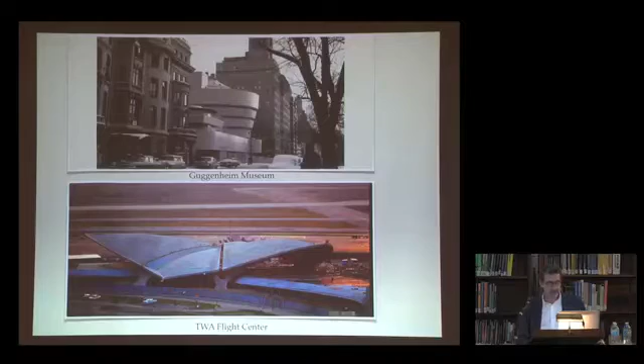Over the last 29 years, we at both ICR and ICC have been extremely fortunate to have had the opportunity to work at some of these great sites. Although periods of construction and geographical location vary tremendously, the same basic human creative spirit to design and build is there. Because time is limited this evening, I'll just focus on one of these sites.

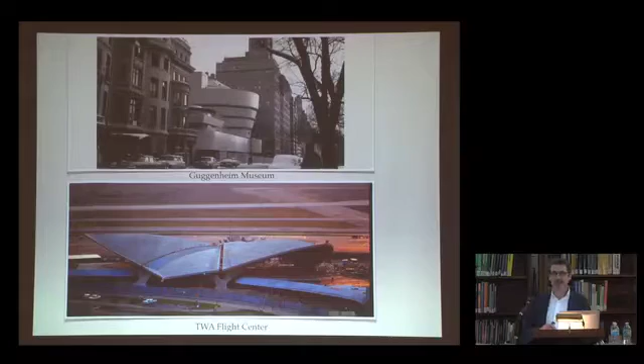And this is quite a departure from mid-century modern, but it will give you a little bit of an idea of the range of what we deal with.

Working closely with the World Monuments Fund, we've been in charge of 4 of their temple sites at Angkor in Cambodia. Working closely with the Cambodian government, as well as UNESCO, we have been designing these conservation programs, training and implementing the work with approximately 130 people ranging from architects, engineers, archaeologists, business administrators, team leaders, and craftspeople. The largest project of the 4 is Phnom Bakheng, and it was the first temple built by the Khmers when they came to the site of Angkor.

This is the general site of the ancient city of Angkor. This is Angkor Wat, and this is Phnom Bakheng.

This is Phnom Bakheng, or a small section of it, when the French came to the site in the 1940s and started clearing the jungle off the temple complex. And this is in the 1950s when the French had finished their work.

I think what's just amazing to note is that this, like I said, was a hill. Over there, it's called a mountain because there's not very many of them. But it continued up like this.

In the 9th century, the Khmers basically took 25% of the top of this mountain off. They exposed the live rock in the middle, and they carved that live rock to serve as the foundation for the structure that's there and that you see now.

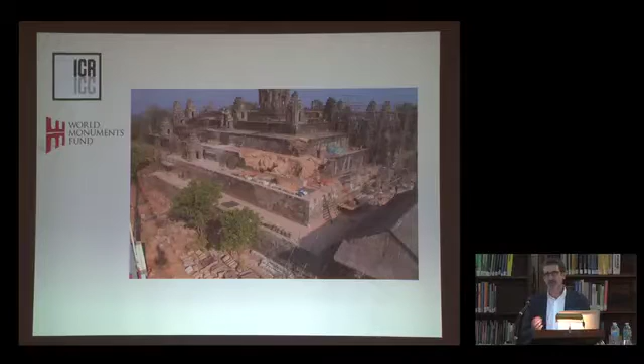Which is mid-century modern buildings. So as another brief introduction, architectural conservation to me is the science related to building materials. The roots of the field can be found in fine arts conservation.

A major difference, however, is that architectural conservators have to design programs for materials that are exposed to the elements, whereas fine arts objects can be placed in controlled environments.

Architects, over the course of time, have designed details into systems, even here at Phnom Bakheng, or in the previous slide, into their buildings that work in balance and to protect the building materials from exposure to the environments.

Yet no matter what, short of moving a building inside, wind, rain, freeze-thaw cycles, and salt crystallization, among other things, are all active pressures that constantly keep the exposed portion of a structure in a state of decay. Understanding the mechanisms of that decay, designing programs that do not accelerate that decay, and managing that decay is a part of our work.

As architectural conservators, we design our projects based on a certain set of goals. We try to save as much original material as possible or as practical. We respect the design intent of the architect and/or craftspeople who were involved in the design and construction of a building. We design materials and methods that are both physically and aesthetically compatible with the original construction materials.

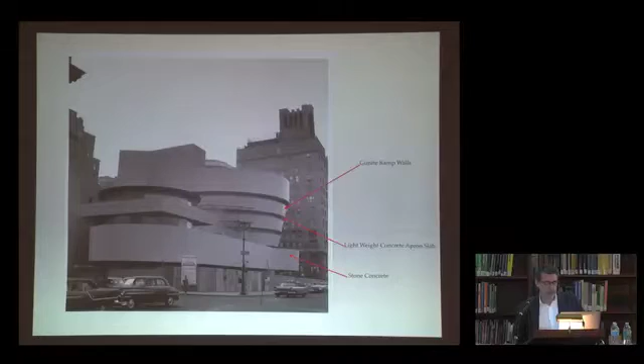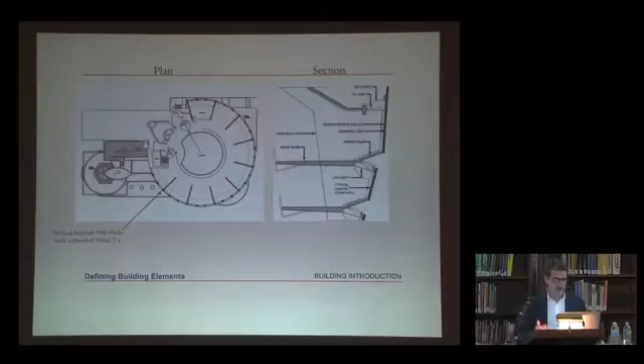There are a few other elements which we should review, and if you were at Nancy Hudson's presentation, she probably reviewed some of these as well. But just quickly, these are going to show up in the talk and in the description of what some of the cause and effect problems were.

So the vertical support web walls with their embedded T's at the web and gunite interface. These web walls are structural, and I'll show you some pictures of them as the building goes up. They run every 30 degrees, I think, and they also have an embedded metal T at their end, which is encapsulated in the gunite when it was sprayed. There are also intermediate T's that are completely encapsulated in the gunite wall.

And the gunite wall is only 5 inches thick. So if you think about something 5 inches thick, with all that steel I was talking about before and these T's, it's sort of a recipe for a little time bomb. If that steel isn't protected, it oxidizes, it grows, and it damages the concrete.

So here I just want to point out a typical gunite ramp wall in section, and the intermediate metal T's again. Wright had talked with a number of people, and everyone informed him that the ramp walls especially required expansion joints. Otherwise, cracks would form, and the incorporation of an expansion joint means there has to be a vertical line, which would have appeared in these gunite walls. Wright just could not sleep at night thinking that his organic form would have a vertical line in it, so there were no expansion joints.

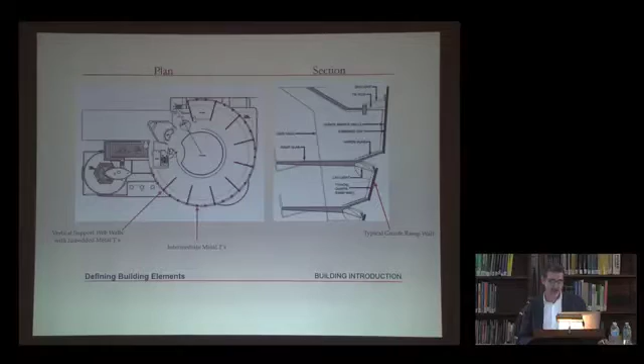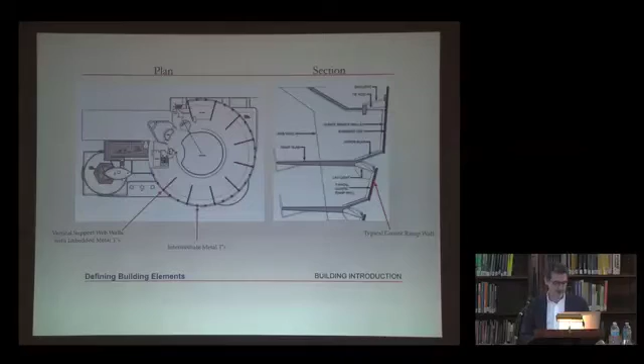William Short was Wright's supervising field architect and was dedicated to documenting the structure in all phases of construction. He would go onto the roof of the building at the south end of the site and take photographs from almost the same location on a regular basis. The amount of documentation on this building is massive, and when I first saw this, I thought the museum should collect all these photographs and make a flip book, because you could watch the building appear before your eyes. So I selected a series of these images to give you a quick glimpse, and they're not very clear, but it's fun to watch.

So here's Fifth Avenue, and I believe 88th Street, and we're right at grade here. A tremendous amount of work had to take place just to get this slab up to grade. But these next series of 8 or 10 slides will start to show you the work that had to take place, and I don't want to stop too much because it will interrupt the sequence.

What's amazing is to watch where all of these temporary ramps are constructed, because that's where the men used their wheelbarrows and actually moved the cement around. They didn't have the big hoppers with pneumatic tubes that could pump massive amounts of concrete. They had a crane that lifted a bucket that dropped about 55 gallons of cement, and then wheelbarrows took this material all over the site. So you can start to imagine that the time it would take to construct such a building was massive, and the same with TWA.

So the steel work is coming up. Now the center is coming up. The way they built this and kept all these dimensions correct was by using this center pole in the middle, and that was the only way they felt they knew where they were at any given time.

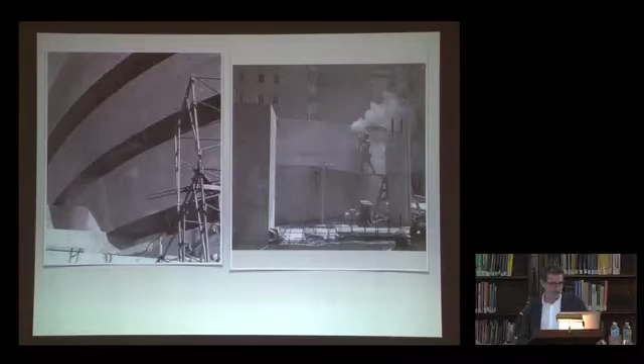And here you can see the contractor starting to remove them. This was such a difficult and expensive task that the work was halted, and the marks were never completely removed. As a result, these marks have become a very important part of the construction history of the building.

And here is a picture taken before the project that we worked on. This is a buildup of about 11 or 12 coats of paint, and you can see those board marks coming through really, really strong.

If we had the time, there are some amazing letters that go back between Wright and the contractor that, in only a way he could, described why it was so important that that contractor remove those form marks. Anyway, there were also locations of the concrete surface that failed during construction. I'm just using these arrows to point out sections where, when the form was removed, concrete fell off. So this was not an easy job.

The contractor who was chosen to do the work was really a road contractor who had done a tremendous amount of concrete work. And I think one of the things we can compare is the level of sophistication that was applied at TWA versus here. They're both grand experiments, but it seems to me from what we've done so far that the work at TWA is much more controlled. There are experts in every aspect of the work there that helped Saarinen achieve his goals.

To continue on with the Guggenheim, this project team was made up of the owner, obviously. The Paratus Group was the owner's rep. Wank Adams Slavin was the architect, Robert Silman the structural engineer, and we were the architectural conservators. It was an interesting arrangement. It wasn't a typical situation where we had contracts with the architect. Everyone had a separate contract with the owner, and it was done, I think, as a way to create an interesting dynamic that I think in the end actually worked out very, very well, but getting used to it for some of us was not so easy.

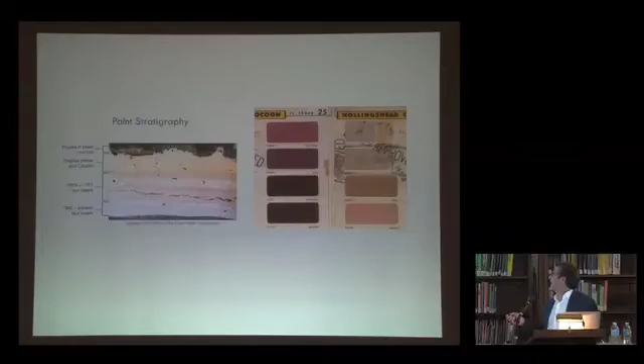This image is a technical sheet or a color chart of the cocoon from the company Hollingshead that provided cocoon, and you can see that Frank Lloyd Wright says OK, FLW, approved, approved, approved. So there was really no question of what he was looking for. And if there was any doubt that he was there while the material was being applied, this photograph was not manipulated by anyone.

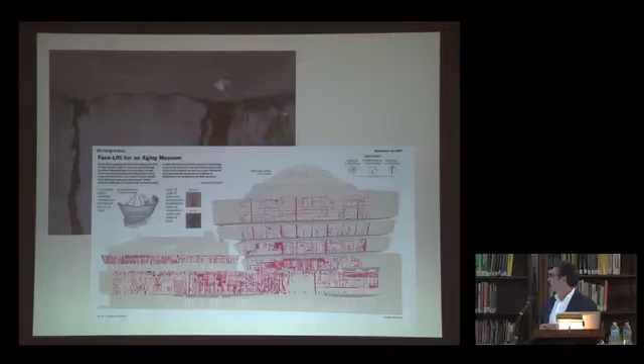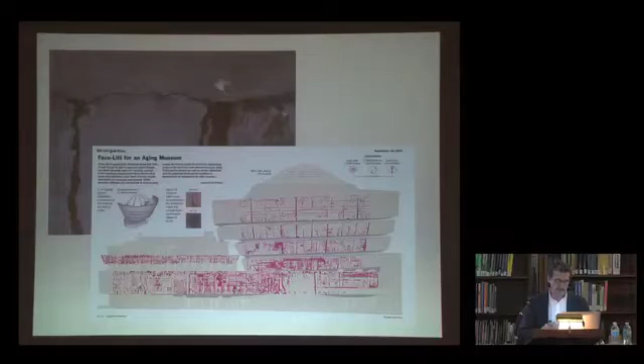Numerous products were tested to develop an effective way of removing the coating. After we determined an appropriate procedure, full-scale removal was implemented, and the original concrete on all surfaces of the structure were now exposed for the first time since 1959. This was done for numerous reasons. One, it had to be done to reapply a new coating in such a way that would have a long life. But also, the whole design team felt that we needed to see the surface in its entirety, to be able to compare and contrast the conditions, which enabled us to prioritize them and then measure them and develop specific repairs for specific conditions. So here is the west elevation and the result of one of the mapping campaigns, which was extremely effective and really helped us separate the different types of conditions, then helped us develop certain repairs, and really started to help organize what was a very overwhelming surface when we first started to see it.

So here's a drawing that's indicating the placement of specific movement sensors that Nancy, I'm sure, reviewed with you in her presentation. But to us, the results of this testing helped our conservation effort by allowing us to know the amount of movement that we were dealing with in representative locations and design specific compatible repairs for each type of movement or each amount of movement.

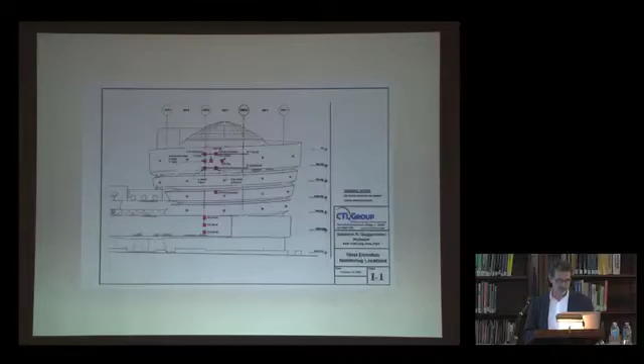And I'll tell you why in a little bit.

If concrete is not exposed to the elements, the pH will be high. As it's exposed more and more to the elements, the pH drops, and the effect on the building gets much more serious as it goes deeper and deeper in. Because once the pH drops, the rebar is in an environment where it can oxidize a lot easier and then start to cause a significant amount of problems.

So the fact that Wright found, or someone found, that cocoon is really - we all thought it sort of saved that building for the amount of time it had been in place, which was from 1959 to 2007.

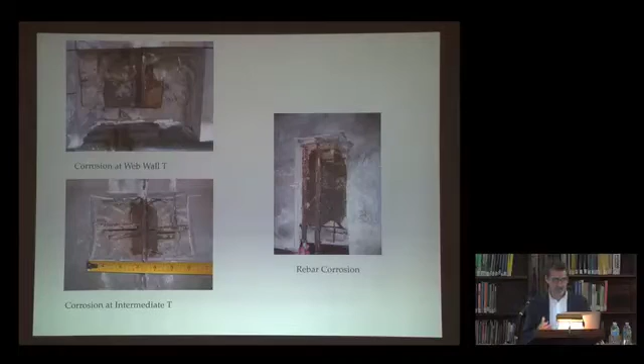So this again started to help us start to formulate a sense of the priorities that we were being faced with.

So we designed an in-house accelerated weathering program that would expose potential treatments to the types of conditions they would be exposed to in the New York City environment. After a great deal of research and evaluations, reviewing about 20 manufacturers, 6 were chosen and were included in the initial phase of this program.

And 2 actually made it through the accelerated weathering program, and we took those and did mock-ups on site and monitored them so that we could feel comfortable about making a final decision.

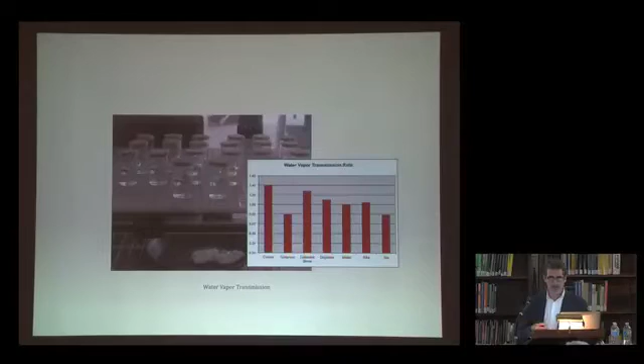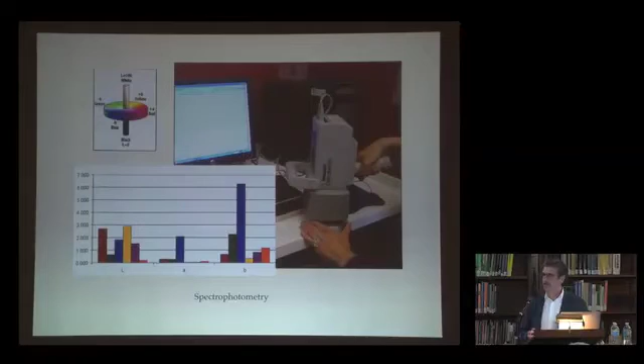A few other tests we ran were to test the adhesion of the different coatings, and we modified a standard test procedure for that. We also wanted to monitor color and color change through each aspect of the testing procedure, so we utilized a spectrophotometer for that.

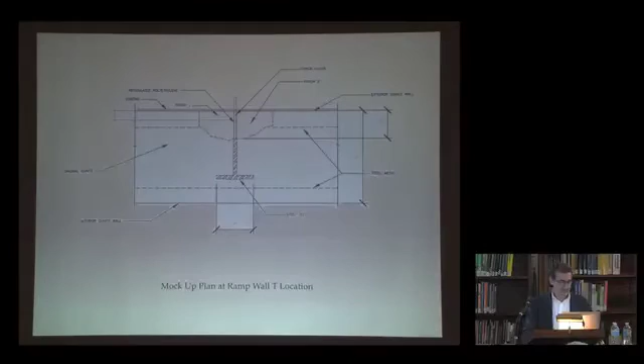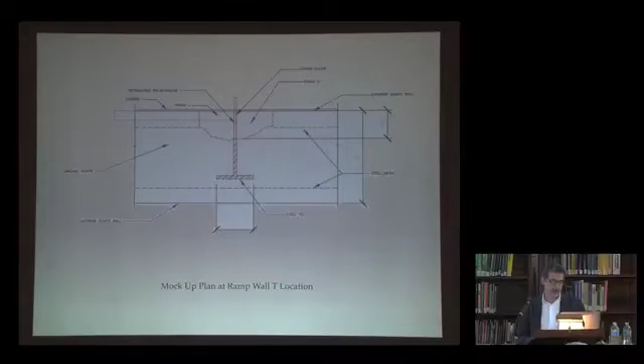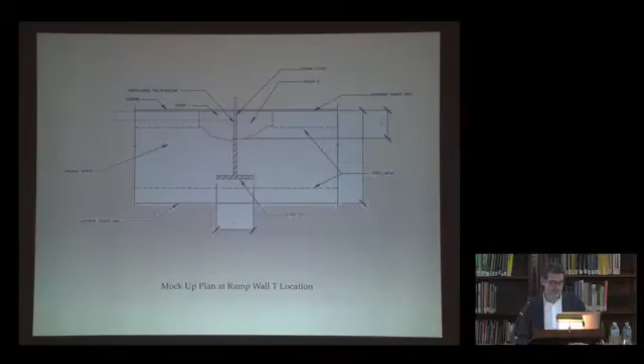For our on-site mock-ups, as I said before, the two final product systems were carried out and left in place to be monitored and measured on the building. The idea with this repair was that we were going to create expansion joints at the gunite wall tees, where the building determined they were required, but Wright didn't want them to be. The size of the opening would be determined based on the amount of measured movement in a given location from those sensors, and careful consideration was given to preventing the repair from affecting the shape of the exposed surface coating as the building expanded and contracted.

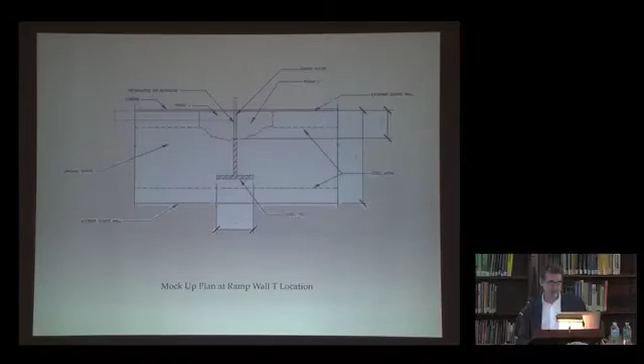This condition was viewed in different light forms, including raking light, as we were trying to prevent the joint filler from becoming concave or convex depending on if the size of the joint was smaller or wider based on temperature. All of this was done so that the surface would appear smooth, uninterrupted, and organic as Wright had intended it.

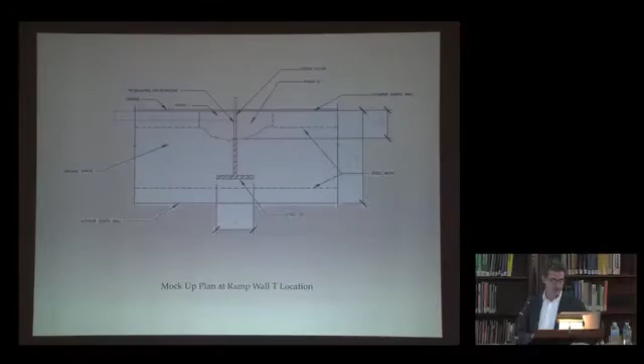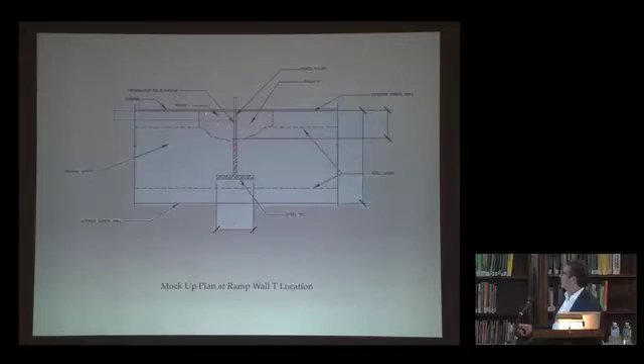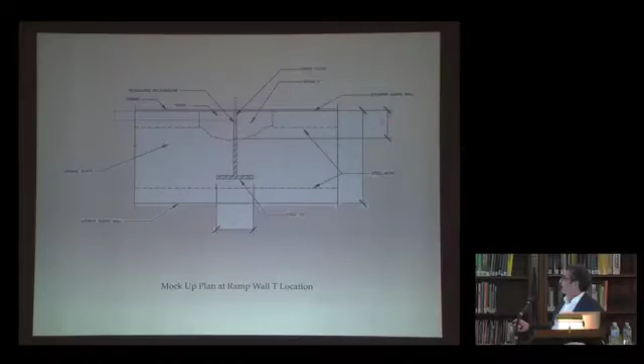This section shows the gunite wall in section—this is the T. We've removed the damaged gunite in this section. We have treated the T with rust inhibitors and coatings, then applied our patch, which I'll show you in a second. Depending on the amount of movement, we filled from the T forward with a specific material, and filled the end with another material, all coated with an elastomeric coating. All of them have to work in unison—we can't have any separation. If we do, we'll end up with the same results as we saw coming out of the accelerated weathering.

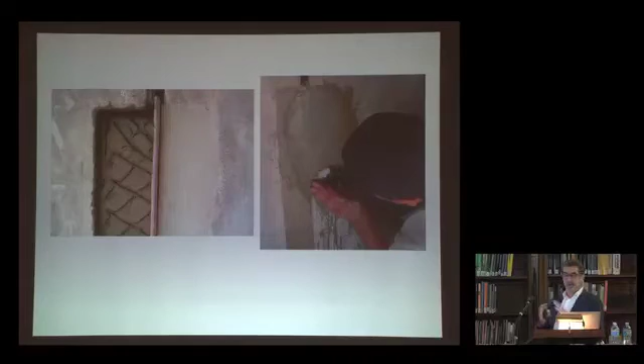So I'm going to run through this now in the field. You can see the materials being removed. A metal plate is installed and held in place by these shims, and the craftsman is installing the patch on one side. Then a dense foam material is inserted to keep the joint at the size we want, and then the left side is installed. If there were any form marks in the abutting original material, those form marks were mimicked and came through. Since the building is round, the sun always shines on it in a raking fashion, so seeing any alteration to that surface would be extremely easy.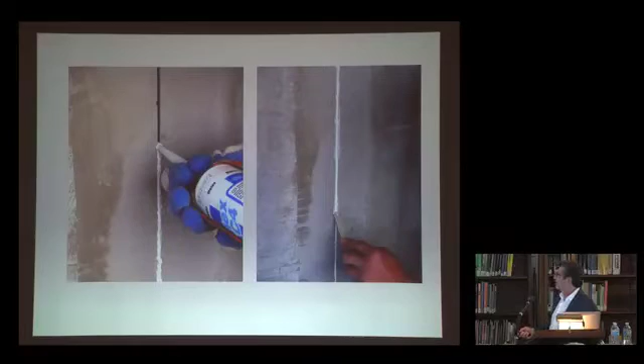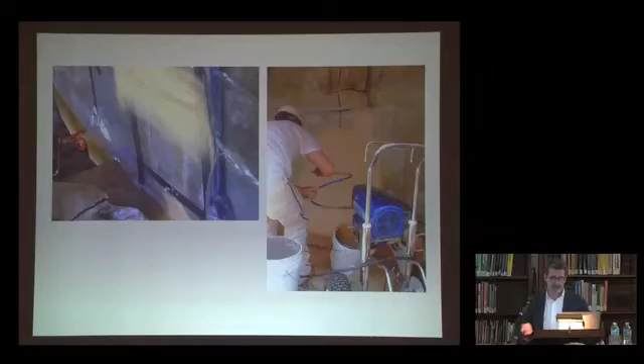Then the crack fillers were installed in different ways, and the coating was applied. Here's the coating being applied, continuing to be applied, and here are the sensors that will be in place as this coating is exposed to the environment for almost a year. Again, basically the same thing—a completed mock-up on site in both images.

So once this whole laboratory and field-based testing was completed, we chose a particular system. And in the end, it was really not a difficult task. This one product, or this one system of products, was what they said they were, and it was very exciting for us to find something that we really felt confident that we could rely on to do what we expected them to do.

So the contractor worked with us, or the manufacturer worked with us, to train people here to apply it properly, which was no easy task. And no one was going to apply anything to the building until their mock-ups were approved.

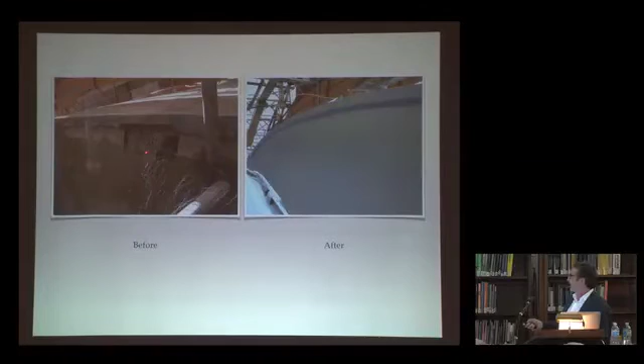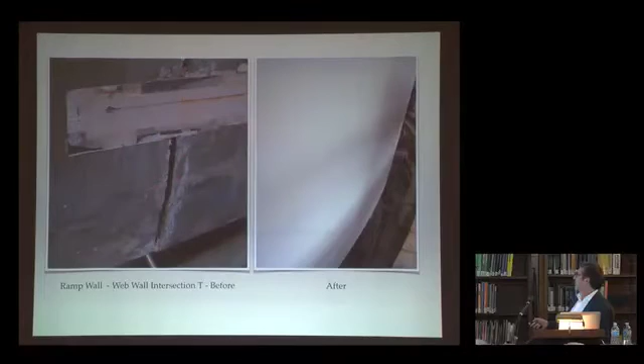And then finally, just a few before and after pictures, and they're not so exciting because everything gets kind of painted. But here's a condition on the apron slab, so we're looking up at the apron slab before and after. Here's a horizontal crack and some paint failure before and after. Here's one of the web wall tees that were broken with a monitor going. I don't know what that is. Before and after. The intermediate tee on a ramp wall.

And the completed building. So this was in 2009, and today we continue to work with the Guggenheim. We actually just wrote a grant with them to the Getty in the hopes that we could start to look at the building from a maintenance point of view and design a long-term cyclical maintenance program.

Obviously, doing this sort of work is a wonderful first step, but it's not the end. Maintaining a building like this is extremely important to protect the investment and also all of the hard work that went into it. So, okay, TWA.

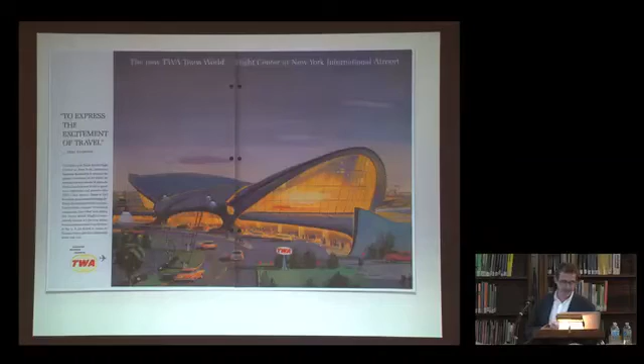Eero Saarinen received this commission for the TWA project in 1956. Wright was already working hard on the Guggenheim. And this advertisement that came out at about the time of completion of the building in '62 described how the building expresses the excitement of jet travel.

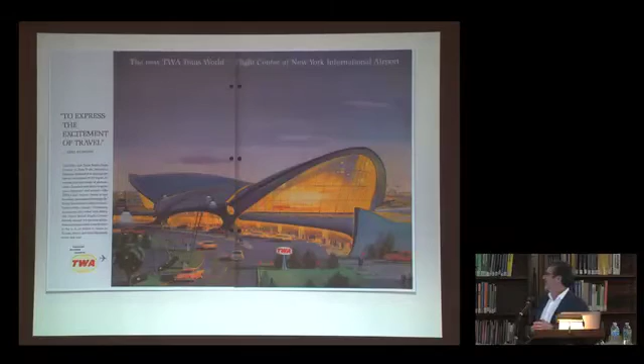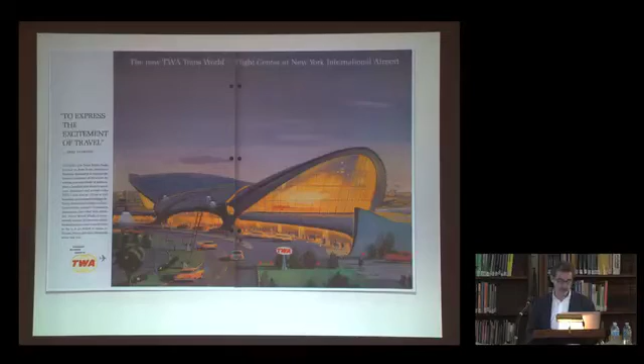And I know Richard will be talking about the birth and death and re-erection of the terminal. But I thought it was important to talk to you a little bit about what went into that design, and really in terms of materials, because knowing that would help us understand again what the priorities were and how we might deal with them.

So I'm just going to describe to you, this is after the roof was, or the shell was finished, but I wanted to let you know that the roof was made up of 4 separate shells, all poured with lightweight concrete, separated by skylights, which also doubled as locations to absorb expansion and contraction. Each of the 4 roof sections that you see are supported at 2 points by the 4 buttresses, bringing the load of each to the ground, and all 4 shells are connected as they touch at the center of the roof, which you can see.

The design team working on this phase of the work at the TWA Flight Center involved the owner, MCR Development, Beyer Blinder Belle with Richard, and Arup engineers as well as ICR.

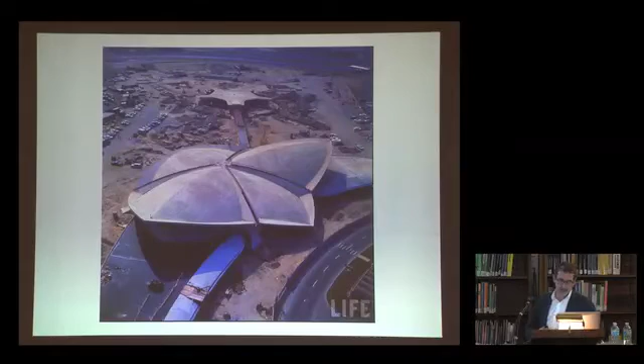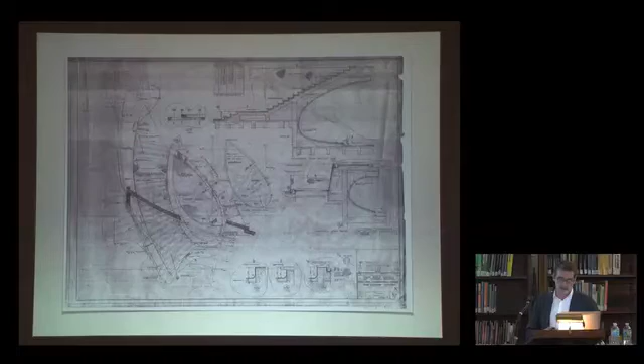This is the interior stair, both in section and in plan, with all of the curves and all of the details. And when you start to see the interior, which I'm sure Richard will show you, it is literally sculpture. There's no two ways about it. And here's an example of a structural drawing that was supervised by Ammann and coming out of Ammann and Whitney's office.

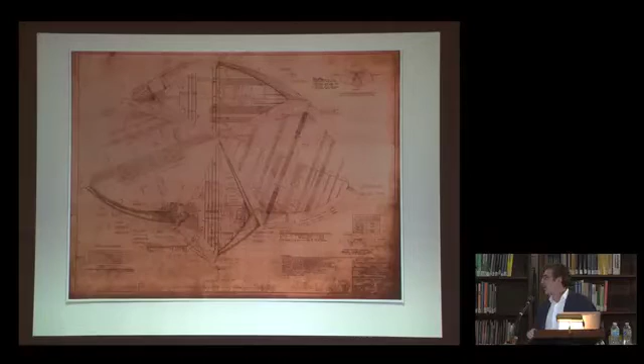Close-up examination of this plan shows exact locations of the rebar and steel layout for each of the 4 shells. You can zoom in on these drawings and see tremendous amounts of information, but the precision with which this rebar was designed—the size, the shape, the contours, the overlap, the way they were connected—everything was thought out.

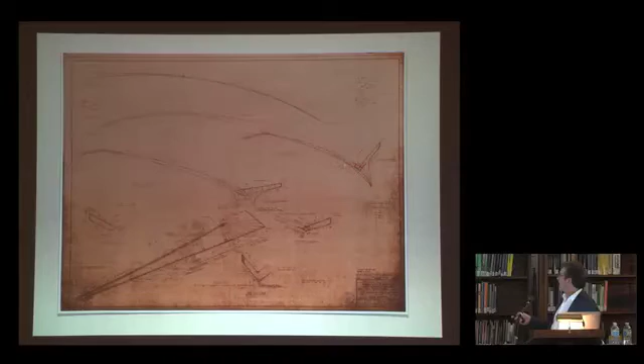Numerous books of calculations were devised to try to make sure this worked. Many drawings in section were also created, and here is just one of them. Basically, there was a drawing every 3 feet where they cut a section through the roof, and at those sections you can see the steel is laid out exactly how they wanted it.

So how did they build it? I was fascinated—I don't know these buildings well, I'm just starting to get to know them. To do it, they had to construct a steel scaffolding frame that could support the roof. Once that frame started to take on the shape they wanted, they had screw jacks at the top that lifted wooden beams into place so they could build this lower section of the form. This is basically the ceiling you would look at from below if the insulation weren't there.

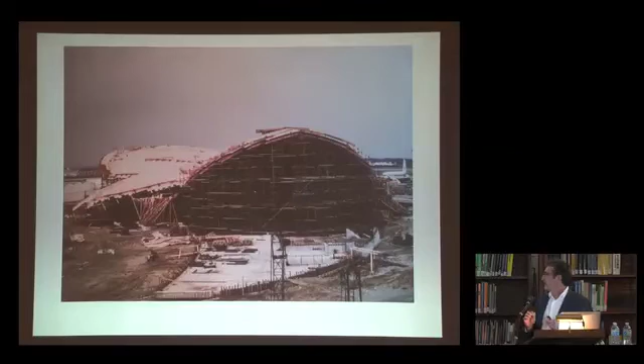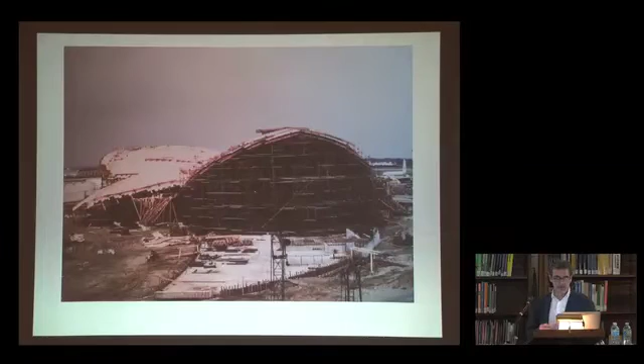The level of craftsmanship here was absolutely essential, because if there was a mistake, it would show in the concrete, and if the mistake showed in the concrete, the lines Saarinen was looking for would not be there. One anecdote: the engineer wanted to create the peaks as curved, and he was dead set against that. He said, 'When I fly in on an airplane, I want to be able to look down and see an edge there.' So we're talking about levels of detail that are very well understood and focused.

After the formwork was complete, the rebar that we saw in the structural drawings was all laid out and carefully set in place. A final review and approval of the rebar placement was carried out, and everything was checked and double-checked and triple-checked, because once the cement pour began, there was no turning back.

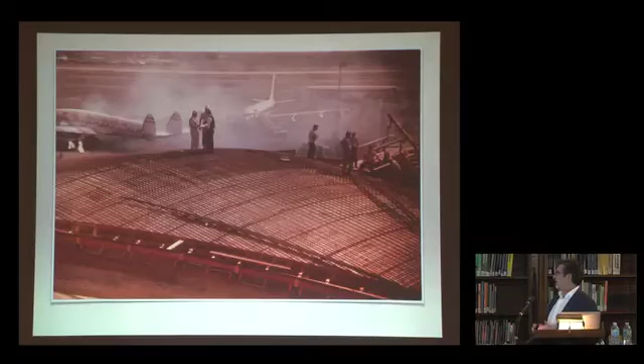Each separate shell had to be one monolithic pour—they could not stop. That was one good reason they had the skylights: they didn't have to pour the whole roof at one time, they could at least do one shell at a time. But with those 55-gallon buckets of cement coming up, the pour of the larger shells was about 30 hours each. Here they're starting—they had to do this by day, here's one of those buckets, and they had to do this by night.

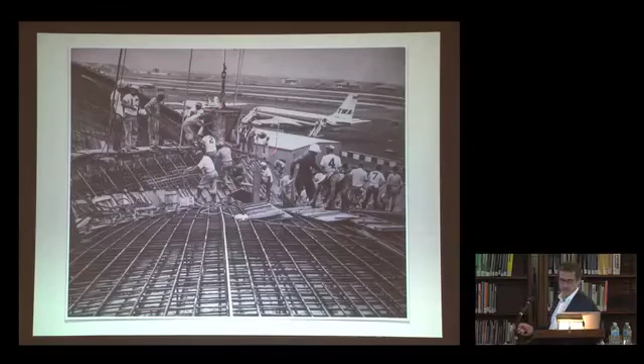A critical moment after the cure of the concrete was the slow and careful removal of the scaffolding support system below. The concrete was cured by keeping it wet for almost 3 weeks, and no scaffolding was moved until the compressive strength of the concrete reached 4,000 psi. They had cores that they were measuring and testing, and nobody, I'm told, touched anything until that happened.

Because of some concrete damage that happened at the United Terminal, which was being built simultaneously, the Port Authority got very nervous about this building all of a sudden. They got so concerned that they hired a specialist from NYU who attached strain gauges to different sections of the rebar and took measurements to make sure the loads were understood—one reading when the rebar was not loaded, another when it was loaded—then measured very carefully as the scaffolding was being removed. They also had points on the building they were shooting constantly to make sure nothing was moving.

Here is an image just after removal of the scaffolding support. And the following is a quote from Abba Tor: 'It took a considerable amount of interaction with the architect to impose some structural logic or discipline on it. It was a creature which started out wild and needed to be tamed and domesticated.'

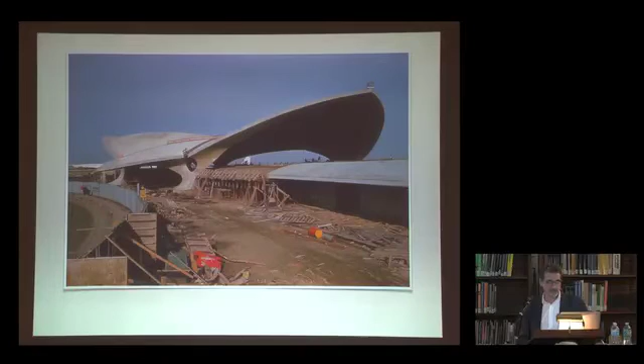And some close-up images after the forms were being removed. It really is quite amazing, much more like sculpture than any building I know. And it's just amazing for me to think about the risks that people were taking at that time. I have to move a little faster. So here's just an overall image.

As I was saying before, Saarinen was designing every detail of this building. This is a color schedule. I could go on and on with the details that were being designed, but what was great about this was that the kind of specifications we were seeing are the kinds that architects, or good architects, generate today.

And this one here, CC concrete color, was specified for every location that a person would see if they were standing inside the terminal in a main space. To verify that, we took samples, and they were there. Here's the substrate, there's the original finish; substrate, original finish; substrate, original finish.

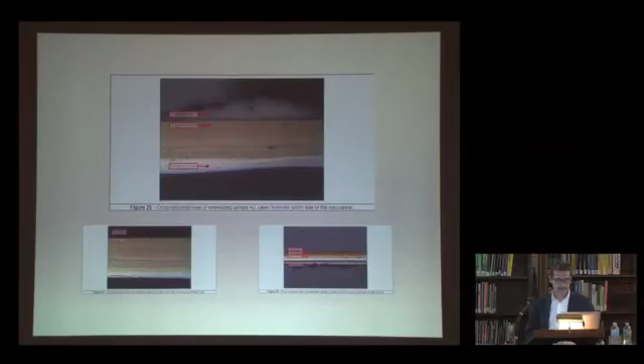And if you are lucky and find some historic photographs, and I know this is black and white and at night, but here is the concrete exposed, and there is the interior. And if you look even in different lighting situations, you can see the similarity of color. Here, the pier, which is stone concrete, the roof, lightweight concrete, the roof of the wing coming and turning under, and the stucco underneath, all harmonize and are similar.

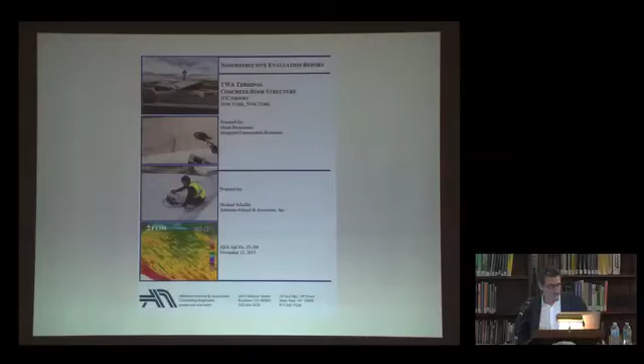So for us, our initial job was to quickly try to find locations underneath the existing coatings that might show signs of distress and damage, as there was no way that we were going to be able to remove the coating in the design phase. So we worked with an engineering firm who specializes in non-destructive evaluation, Atkinson-Noland, who, using microwave radar and infrared thermography, helped us try to find some hot spots through the coatings.

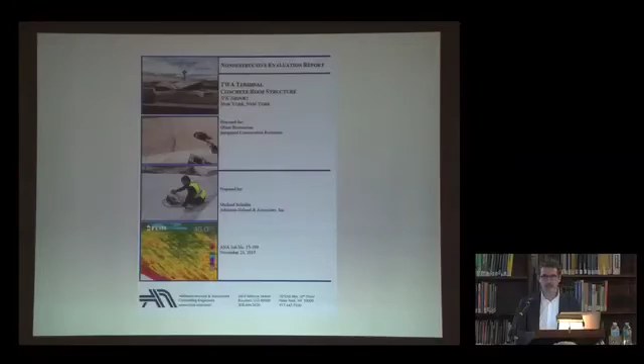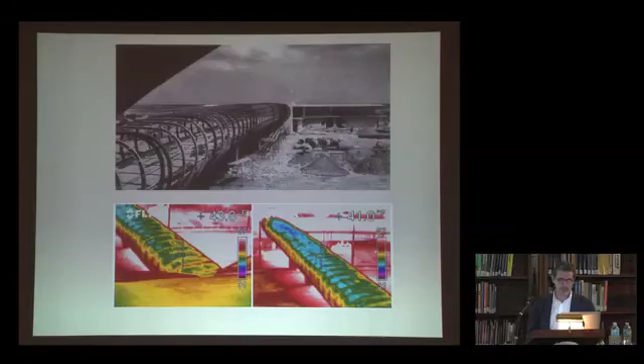So I just want to show you, here's one of the tubes being constructed, and here's one of Atkinson-Noland's thermographic images. Quite amazing what it can show in terms of, if you're lucky, what the actual substrate materials are and what their layout is.

So we start to shoot different sections of the roofs of the building, and if you look at this particular image, you can start to see the rebar showing through. And it's showing through because the temperature of that rebar is different than the temperature of the surrounding materials.

And that only happened in one or two locations, and we felt that if we were seeing that, it might have meant that rebar is closer to the surface. If it is closer to the surface, water could have penetrated down a little bit. If it did, it could have changed the pH, could have oxidized the rebar, and we could have had a problem there. So that was a place that we decided to go.

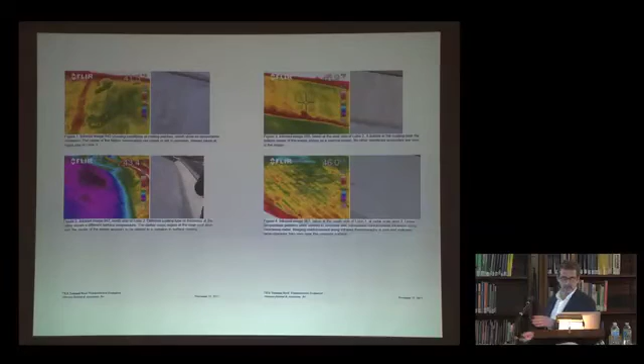As we cut through, let me go back a second, as we cut through these and started to dig down, we saw that they were only on the surface. They didn't radiate down into the substrate at all, even though we thought they might have been associated with the rebar.

So if there's one thing we're seeing different here, I think the precision that was used to create, manage, and pour this concrete on this building has allowed it to stand up so much better. And we're still trying to pinpoint it, but we do not think coatings were applied to the surface of the building for quite a number of years after its construction.

So even another item shows, or another way of showing how dense that material actually is. Cores from representative locations were taken and are currently being subjected to compressive strength tests and petrographic analysis. We will use that data in similar ways that we did at Guggenheim to design compatible treatments, repairs, and potential coatings. And that will be another presentation at another day.